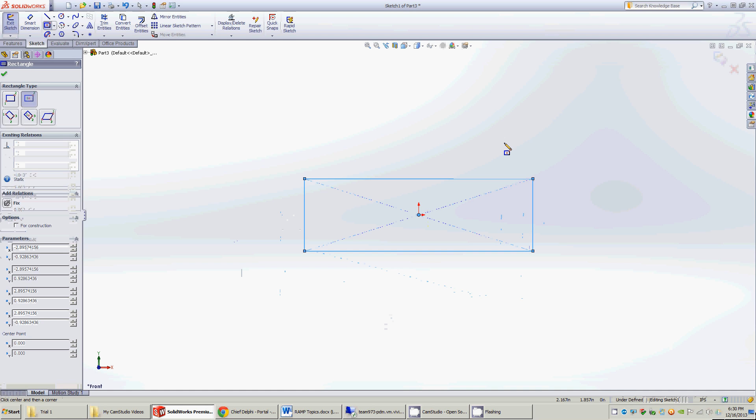So we're going to start by drawing a side rail, and instead of actually starting this as a tube, we're going to start it as a front view. I like to do this on parts where things get a little crazier, so you can have one nice sketch that shows everything. I'm going to start by doing this vertical line at the origin.

This is what I use to control our wheel drop. As you dimension drop, your inner bearing block goes down and your outer bearing blocks go up, rather than dimensioning from the edge of the tube, which can be more confusing for other people. It's nice because you have this 3/16 number.

You don't have to come in and do any math or thought to get your wheel drop. You just change that and that's your wheel drop. It literally is what that number is.

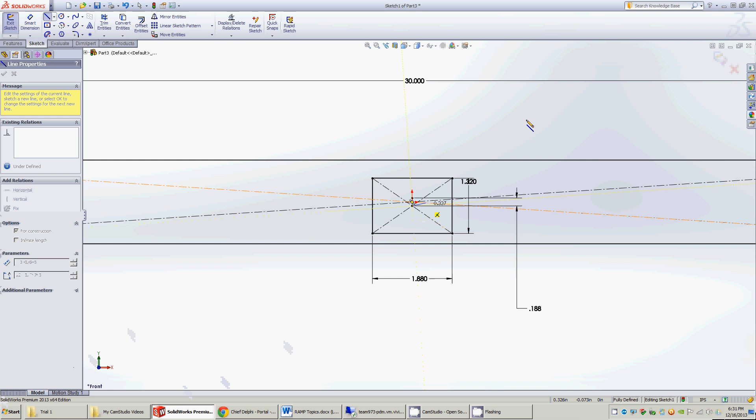Next I'm going to—don't know why SOLIDWORKS is freaking out a little bit here. We'll just wait for that to calm down. Hopefully SOLIDWORKS doesn't crash. Okay, now we're good.

If you're going to do as much as possible on this front view, you really want to show as much as possible. So I'm going to add wheels in here.

These are going to be Vex Pro traction wheels with blue nitrile rough top, which comes out to about 4.3. Ooh, did not mean that to be horizontal, so we'll fix that.

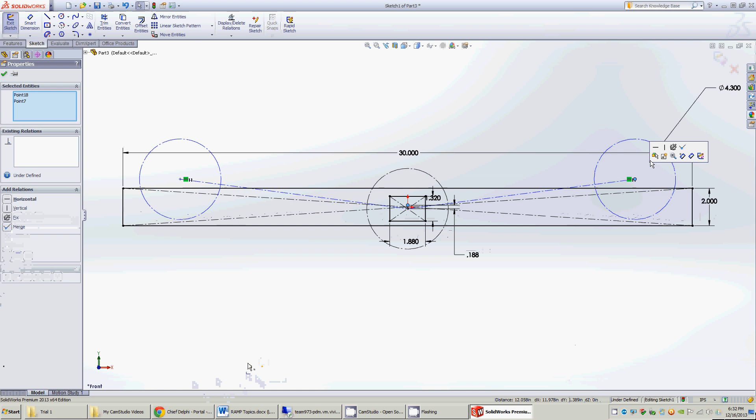Make these equal to get equal spacing. Make that horizontal, and make them horizontal from there. I like to dimension on chain spacing, so 12 inches is a good number for 25 chain.

You can see we still have quite a bit of room left on that rail, so we could come back later and make that more aggressive, but we'll keep running from here.

Now I'm going to start drawing our outer bearing blocks. You'll notice I like to do a lot of construction geometry and relations to equate stuff so that I don't have to dimension as much as possible.

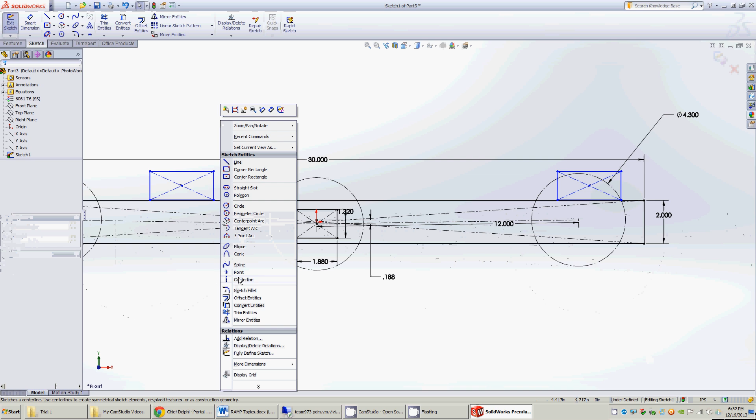Anytime you can do something with construction geometry, I feel you really should, to minimize the number of dimensions you have to change if you want to come down and change something down the road.

Okay, so now we have these slots at the right height. Obviously they're the wrong length. Ooh, very wrong length there.

What I like to do with these is, instead of actually dimensioning this block, I like to draw a block at the wheel and then dimension the functional dimensions from there.

I'll do this left edge at about 50 thou, just to take up any manufacturing errors. And this right edge—oops, oh not that—okay, go back a step.

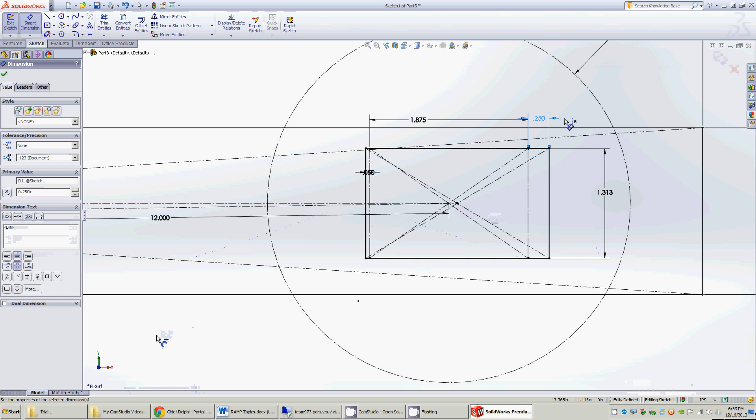This right edge at 250, that's what is doing the tensioning. Now, if you're less confident in your stuff or you want to change things later, you can do a longer bearing block slot. We kind of nailed this stuff the first time, so these numbers work for us, but I wouldn't hesitate to make your slots longer if you feel like you need that.

So now we have most of what's going on. I would like to put my gearbox holes and tensioner holes there, but we don't have that information right now, so we're going to skip that. We can always come back. So I'm going to extrude this.

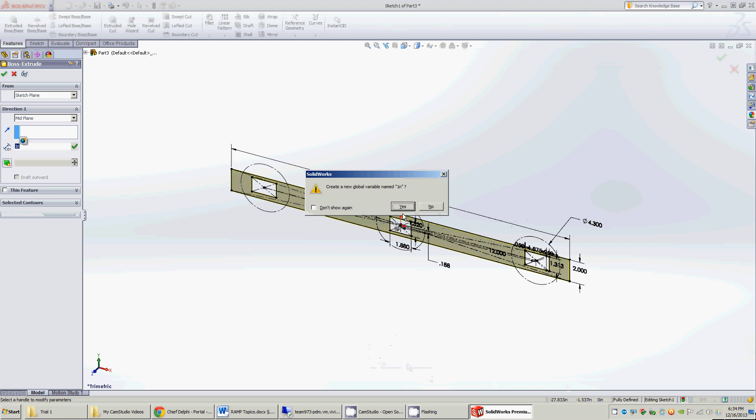Now, I feel you should always do stuff mid-plane. Oops, not trying to make a variable there. What, am I hitting the wrong key? What's going on? Oh, I've turned off numlock. There we go, back in action.

But SOLIDWORKS is freaking out a little bit, so the video program I'm using, for whatever reason, is causing SOLIDWORKS to lag really bad, so I apologize for that. So I do things mid-plane to put as much symmetry into the part as possible, and hopefully this does not crash. Let's wait for this to finish up.

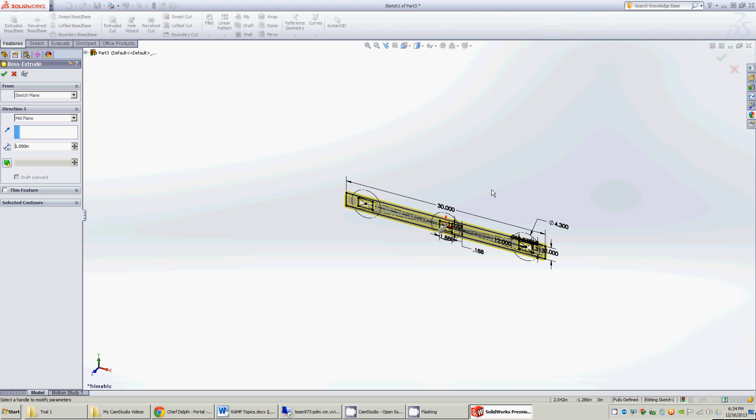So even if your part may not be symmetrical in all of its features, you probably have some features that are symmetrical, and putting those around the planes of symmetry makes using construction geometry, mirrors, or revolves easier to do. I feel like if you have to come in down the road and add a reference plane just to do a mirror, you've probably laid your part out wrong.

God, this video program is really dragging. There we go. Okay, so I like to name my features. It doesn't have to be anything perfect, just enough that yourself in the future, or someone else with a little bit of knowledge, can come in later and edit stuff.

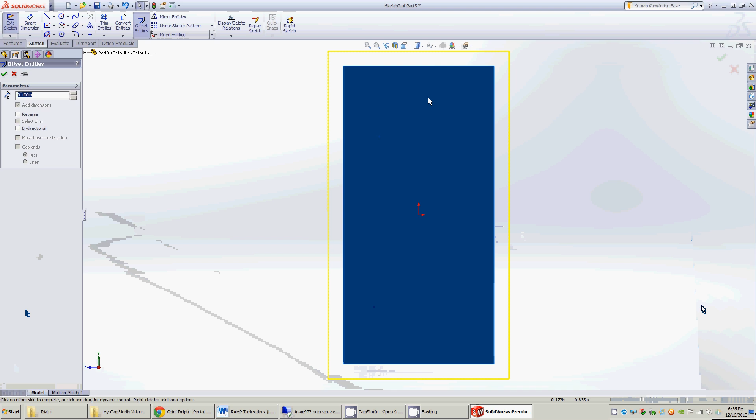So you'll see I'm going to cut this tube out now. I really like using offset entities for this. It's real fast, you can do this with one dimension then, and just cut that through all.

Make sure you're not doing this kind of stuff blind, because then if you do come back and change the length of your tube, you have to change that number. So I do see a lot of people do blind 12-inch cuts for a 2-inch part just to solve that problem, but through all really is the right solution there.

Alright, so that is our side rail.

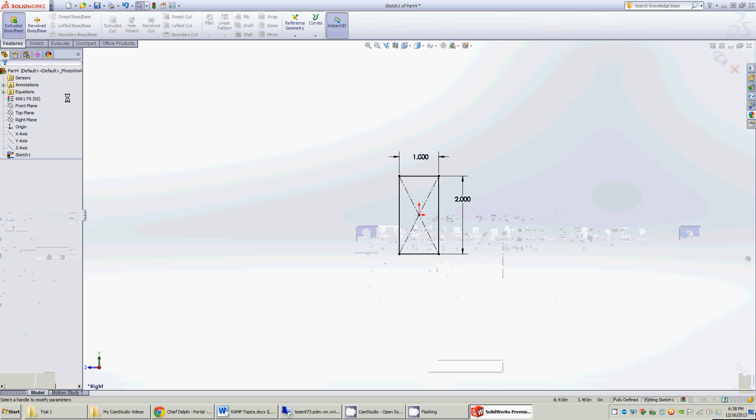So before we do anything more on this, I'm going to start kind of on the assembly. We're going to make our cross member now. This is a good part where I actually do like to start by drawing the tubing first, and I think the best way to draw tubing is use the center point rectangle, dimension your dimensions, extrude that as a thin feature with the thickness you want.

We're going to go 16th wall here, make sure that's on the inside, of course mid-plane just like everything else. And I think 24 inches probably works out here, so go with 24. Name that cross member.

So I do want a hole pattern on this, so I'll come in, and you'll see I use the construction geometry as a quick way to get horizontal or vertical relations sometimes. It's not inherently right, but it's not really wrong, and it really saves a lot of time for me.

And then we are going to linear pattern this down the length of the tube. So it should be 47 holes, yes.

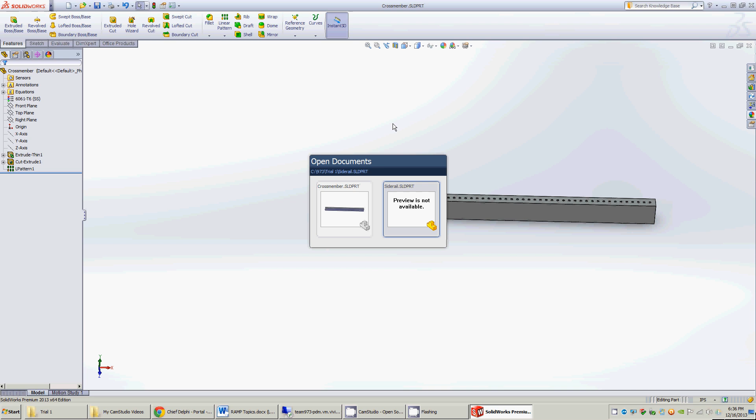Alright, so now we can start making an assembly and call that frame. So, make assembly from part, do a little thumbtack, place the parts. You notice I purposely did not put that at the origin. I'll explain why in a second.

Just like in the parts, I like to build in as much symmetry and logic to the assemblies as possible. So I mate a lot of things by their planes so that it kind of averages out over time that this does make things easier to work on.

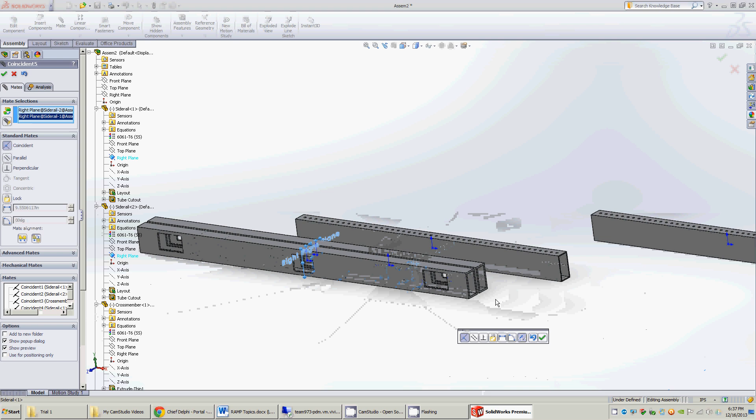And when we get to doing the top robot level assembly, it's nice because you really have a lot more control of where certain things are and for checking mass properties and that sort of thing. So they're all on top plane now, top plane with the plane of the sketch. I'm going to mate the two side rails together. You'll notice I'm going to do one backwards because the side rails will end up non-symmetrical in and out.

I will do the same thing for the two cross members in case there's any non-symmetry that comes up later. I hate having to come back later and change the direction of a tube in assembly, which might have a whole bunch of mates at that point.

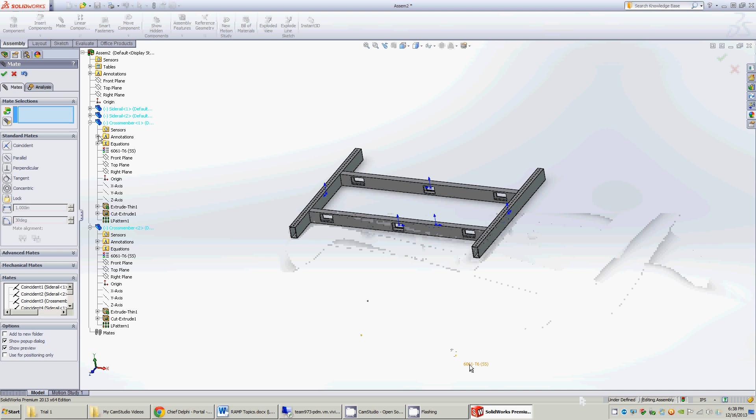So now you can do things like take the right plane of this cross member, make it the front plane there, and take the right plane of a side rail, make it the right plane there. Now you're really starting to lock things in.

These side rails are still loose this way though. Let's see where that plane is first. A great tool I love that I unfortunately didn't find out until about 2 years ago is the Symmetric Mate, which lets you mate around a plane.

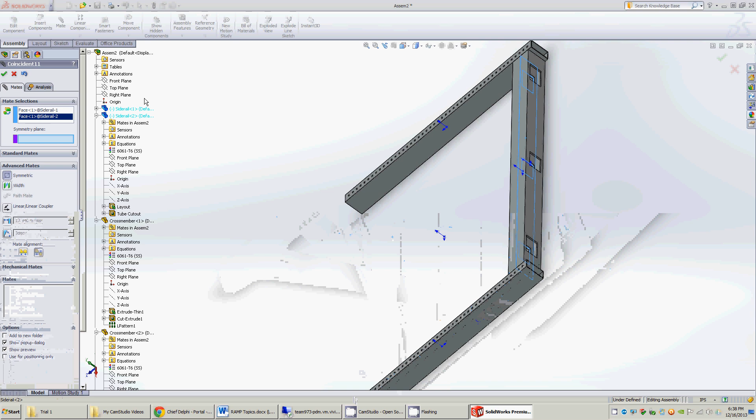What's really nice about that is it lets you dimension what you really care about. So let's say here I really want to dimension my wheel wells versus the inner dimension, so I can come in and do that. Let's go with 3 inches here, doing some giant wheels and see how that works out. So if I did all that right, we should have a fully constrained assembly.

We do. Cool. With the origin placed in the center of all those. Alright, so I'm going to turn the origins off, save that.

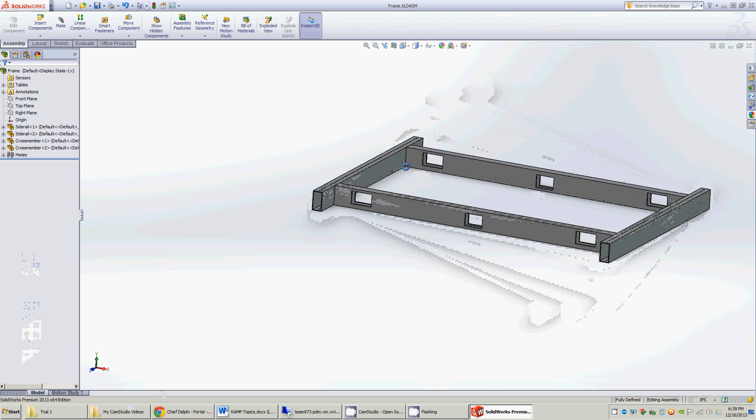Where do we go from here? So I like making the frame a sub-assembly too, and you'll see down the road why I like doing that. I didn't really have a plan for these videos coming in, so I may stall a little bit halfway through, hopefully get better at these in time.

Add the whole pattern to this guy. So for parts that I know are on half-inch increments and are never going to change, I get super lazy dimensioning these holes and do this because that saves me a lot of time.

I'm actually doing things a lot slower for these videos than I would usually, partly because the video program is lagging, partly because I want you guys to see what I'm doing. A lot of these things I do let me save half a second at a time, and that really adds up during marathon CAD sessions, I think.

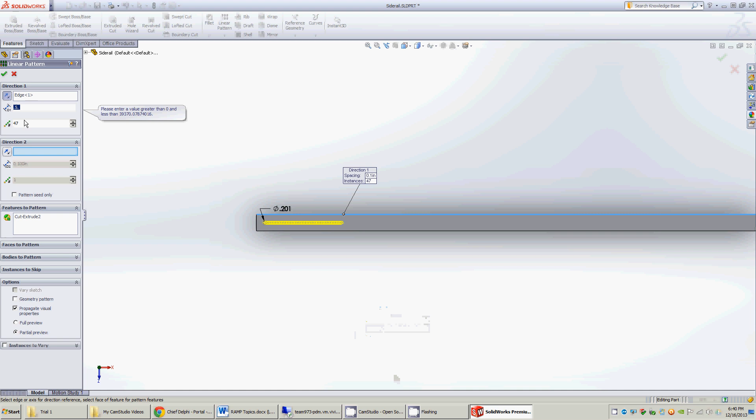This should be... oh, I don't know what's going on. Oh, it's complaining about that decimal. 47 holes. Yes. Save that.

Oh, I guess we want to put some fillets in here, so we get to use one of my favorite tools. We do a quarter-inch end mill there, so an eighth-inch fillet. The fillet wizard saves so much time.

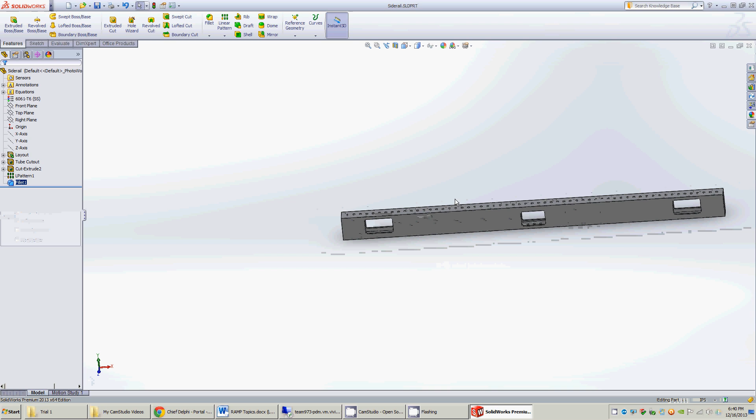Unfortunately, I think it may still be this way, but if you do a configuration, SolidWorks won't let you use the fillet wizard, and that's a real bummer. But this is not a configuration, so that's not a problem.

So we look at our frame, that looks good. Maybe let's do our gussets now.

I'll show you how I like to draw some of our gussets in a way that can save a lot of time. Once again, this is stuff I would not do at work because people would make fun of me, but I will do it in FRC without shame.

So you can see I just drew a bunch of lines. I'm going to make those half-inch spacing. Then I'm going to put holes on those lines. Maybe I want another line, looking at this now.

And believe it or not, this is how we draw most of our gussets, because it's really fast. At one point in time, I liked drawing gussets at the assembly level, but with how clean our hole spacing is, I found that often just made things harder and more confusing, and it's quicker to lay stuff out like this. Actually, let's make those holes...

196. I also love to abuse the... I do not have my tool set up on this computer, by the way, so that's going to bug me a bit. I like to abuse the slot tool for drawing gussets, because you get stuff already kind of filleted for you.

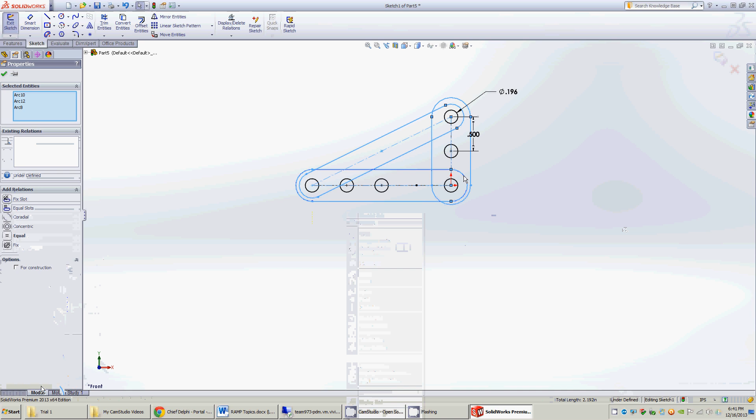Make those 0.25. Let's say we're not going to pocket this guy, and we just select what we want. Just out of habit, I do make this stuff mid-plane, just kind of muscle memory. I guess we got a free pocket there. We'll take that out, and we'll name that gusset.

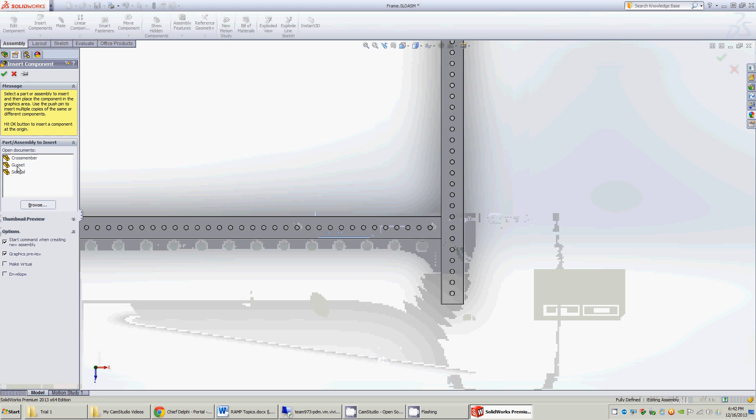Go back to our frame. Do that guy. Now, some people in this situation really like to heavily use mirrored components.

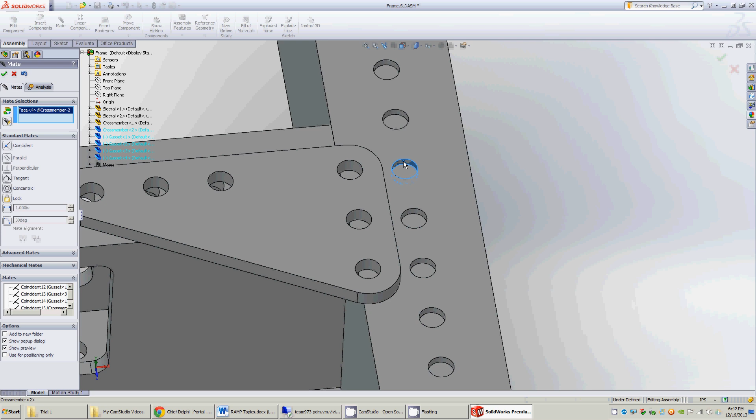Maybe I'm just wrong about this, but sometimes I really get myself in trouble with mirrored components, so when I can, I actually place stuff manually. But if you feel like you have a better way of doing this, I would love to hear that. I'm always stealing SolidWorks tricks from other people, and that's one of my favorite things to ask a new person I work with: what are your top 5 favorite SolidWorks tricks?

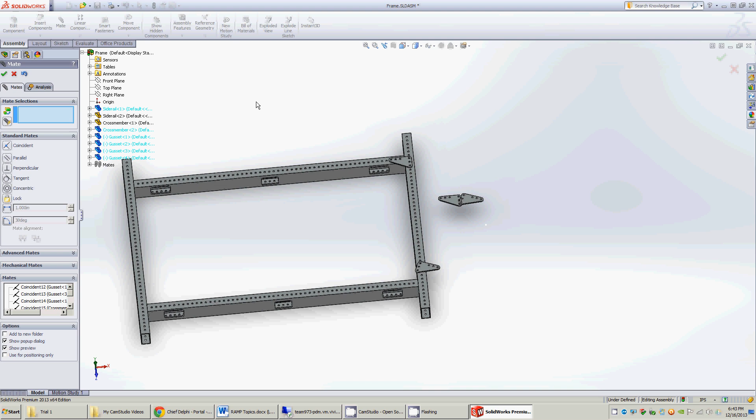Now the video program's lagging me a little bit, so we'll wait for SolidWorks to catch up. It's not catching up quick. That is unfortunate. Kill some time. Oh, there we go.

I like asking people what their favorite SolidWorks tricks are, because there's just so many of them, and it's also interesting to see different people's styles in SolidWorks.

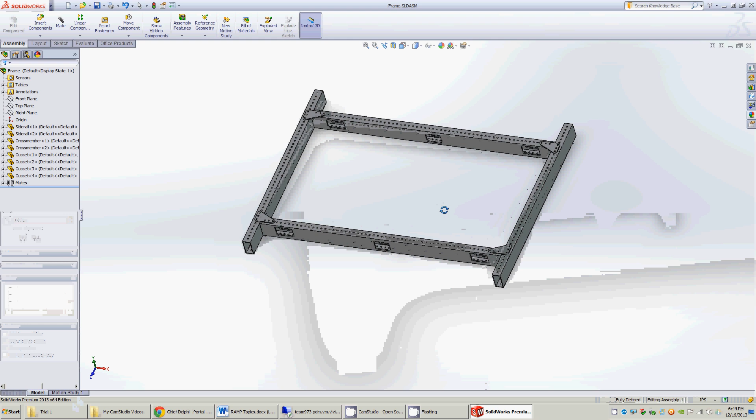So just make these gussets. You'll notice I'm not putting a gusset on the bottom side, and that's because I like to use the belly pan as that gusset. Now the assembly's still totally constrained, looking good.

I guess we can start making our drive. I'll admit I cheated and have some things done already, so I'm going to make an assembly from assembly. I'm going to put that frame in there.

Turn off the origins. Right plane to right plane. Forgot to float it first. Come down and change that to float. Hitting the wrong things. Right plane to right plane, front plane to front plane. Not mating top, and you'll see why I do that in a little bit.

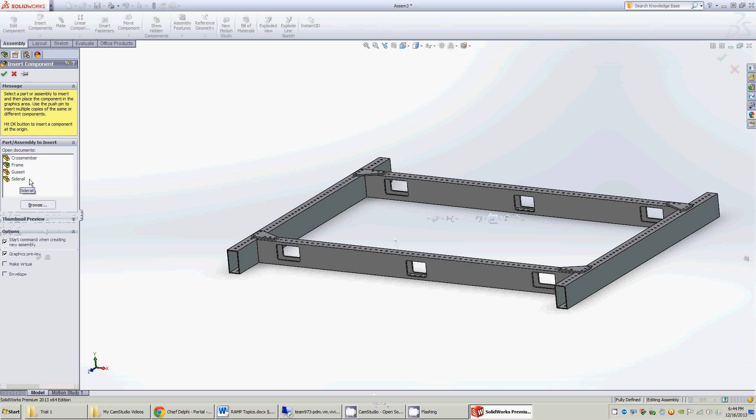So now I'm going to insert some components. Browse, let's get our bearing block in here. You'll kind of see a similar style of mine show up in a lot of things I do. And now it's lagging again.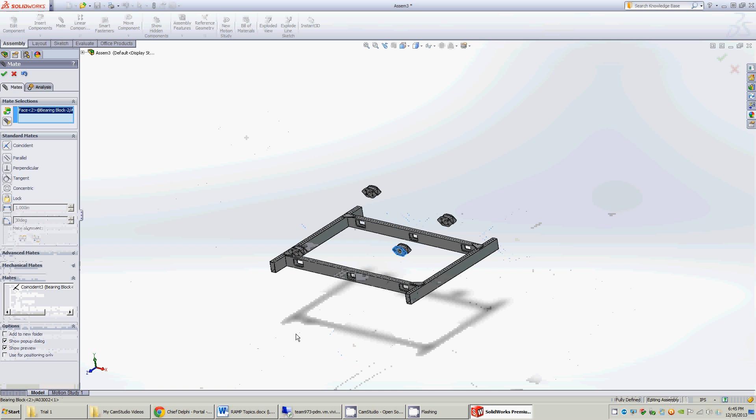There we go. I really like to dimension things like this together a lot before I place them to the frame, to eliminate as many dimensions as possible, really.

Once again, I've always felt like mirror does not work out well for me in situations like this, but if you disagree and have a good example, please show me, I would love to see that. So you see I flipped those around because there is some non-symmetry in those bearing blocks.

Actually, if you zoom in and look, there's an air gap on this side. This bearing block is 990 thou long, so that when you clamp 1 inch or nominally longer than 1 inch tubing with powder coat and stuff, you really clamp it.

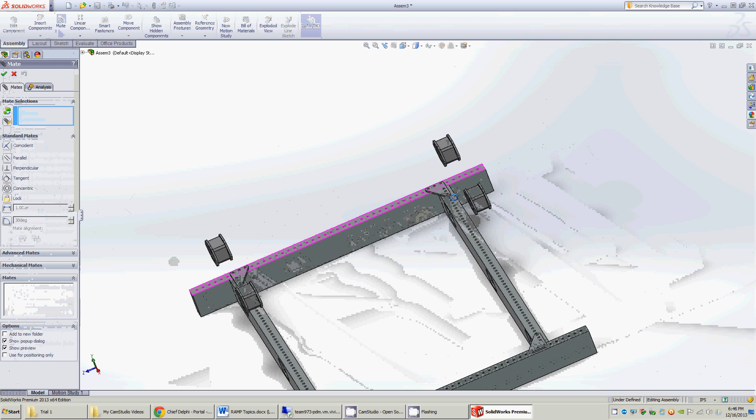I also like this because our bearings are actually in that solid block. These face plates don't touch the bearing at all. You can kind of see that if we zoom in here. That means no matter what the thickness of our frame is, if we get different tubing one year, different powder coat, it doesn't affect our shaft length at all, which is real nice.

Those bearings stay the same dimension apart. What we do is that inner plate is one that we tighten real good and lock tight and then never move again. So that is why we like to have the outer plate be the one with that 10 thou gap.

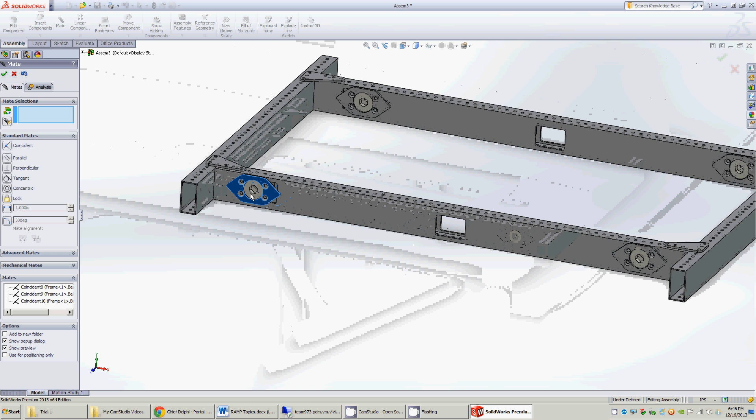So now you can see that when I move one bearing block, they all move, and that's nice. Oh, I forgot one thing I like doing, and that's coming in and using one of my favorite relations once again, the symmetric.

Let's go to Advanced Mate, Symmetric, and this should be the right plane? Yes. So now if I come in... oop, I guess we missed one. Let me rebuild and see if I did miss it. Yep, we missed one mate I wanted to do, and that's this guy, concentric to that guy.

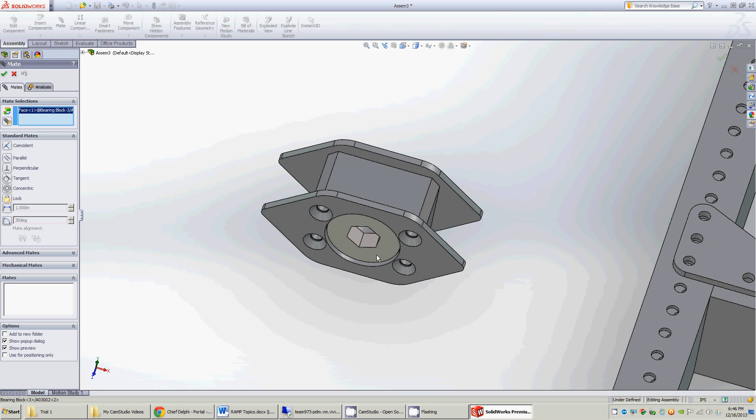So now if we just dimension one bearing block's location in terms of tension or travel, they all are set, and I think that's really cool.

So just to cheat a little bit and show a principle, I'm actually going to add a bearing block. You know what? No, we'll come back to that. So we have this in. Let's save this and call it drive.

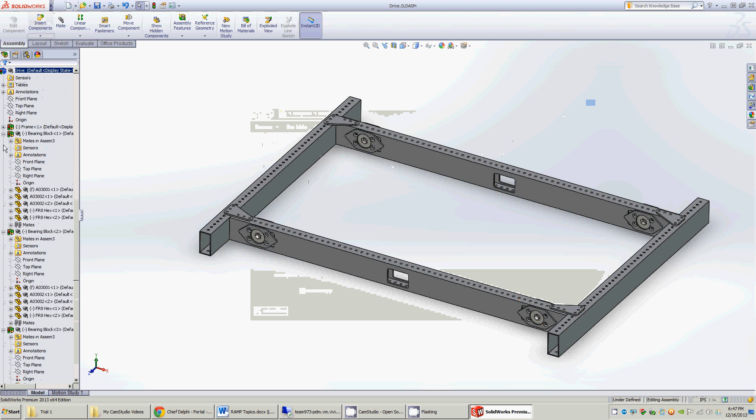What I like to do for assemblies where it makes sense, and drive is definitely one where it makes sense, is make this top plane actually be the floor of the field. So I'm going to cheat a little bit right now. Later I'd actually like to do this with the wheels in there and make it tangent, but I'm going to do some mental math instead.

So we know it should be 4.3 divided by 2, minus 1, plus half of our wheel drop, which is 3/32. I'll come in later once we get wheels and dimension that to be tangent so that the wheel sets it.

And now what we've done is if we come into mass properties, our Z mass property is placed exactly on the top plane. And I've phrased that horribly.

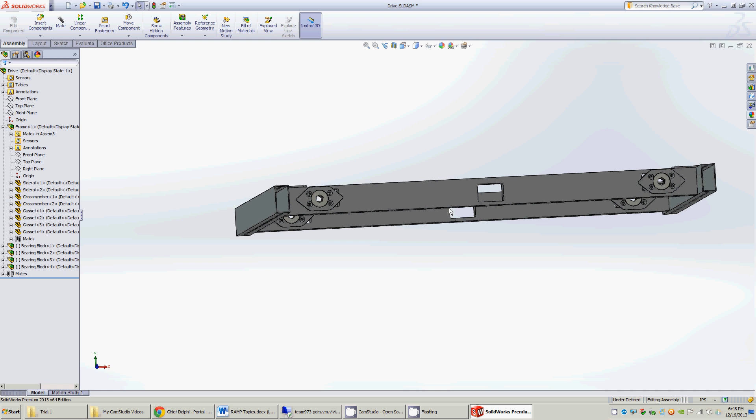When you check mass properties, the dimension to the center of gravity in Z is the actual dimension from the floor, not some arbitrary height where you then have to remember, oh, our origin's 4 inches off the ground. No. When I make this into the top robot level assembly later, that assembly has its origin at the floor.

With the front and right plane centered, Y and X have a similar effect—it's your CG from the center of the robot, left, right, front, back. So if you get 2, 2, it's forward 2 and left 2, or whatever that coordinate system is. And if you get a Z of 6, it's 6 inches off the ground, not 6 inches plus something.

It's little things like this that I think really make things just easier. And anytime you can save a couple minutes, you really should.

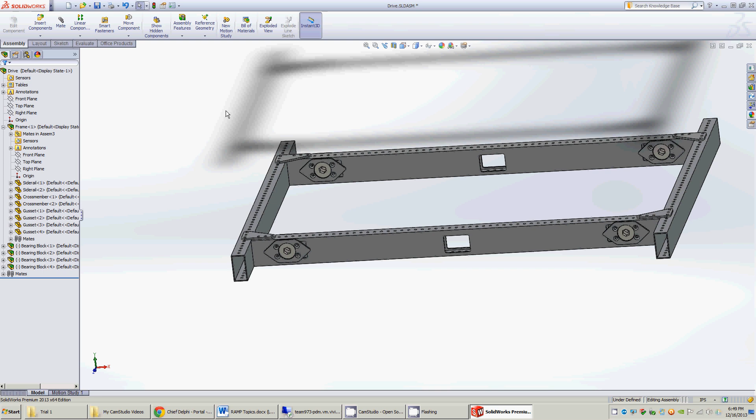So now we're going to come in and make a single speed gearbox. This is the one that can really get us in a lot of trouble, so hopefully it works out well for us. I think the origin for a gearbox should be the output bearing, so I'll start with that.

Maybe I'll pocket this gearbox, maybe I won't. I'm always afraid of teaching people pocketing because it seems like people focus more on pocketing than design, and I think that's wrong.

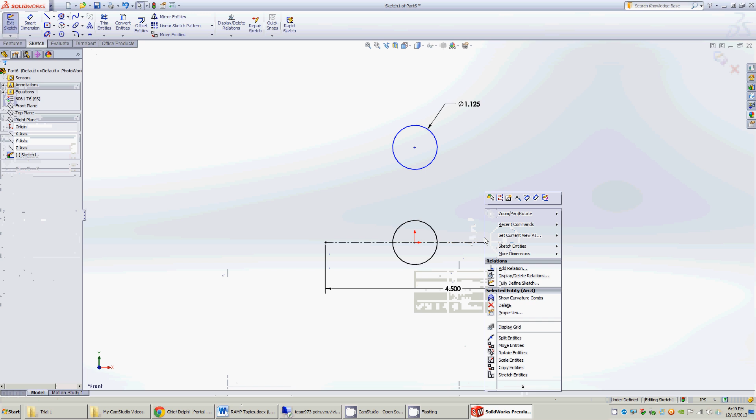Also, you'll see that I'm going to cheat and not use Hole Wizard—I'll explain why when I get there, then show you that you can still kind of do this style with Hole Wizard. In FRC, at least for our team where we use the same few fasteners, it's easy enough to not use Hole Wizard because you know the size of everything, and it makes it easier to do things in one sketch. Then, if you really want to use Hole Wizard—and it's really good for a lot of reasons—I'll show you how you can still do that with this style.

So I have no idea what gearing we're going to do, so I'll just start making some stuff up. This might put us at an impractical speed, but hopefully it doesn't. I like modeling the OD of gears, and for 20 DP, that's the tooth count plus 2, divided by 20. So both these gears are 50 tooth gears.

Let's say we have a 20 tooth pinion here, so that would be 22 divided by 20. No, let's do a 14 tooth pinion—so 16 divided by 20.

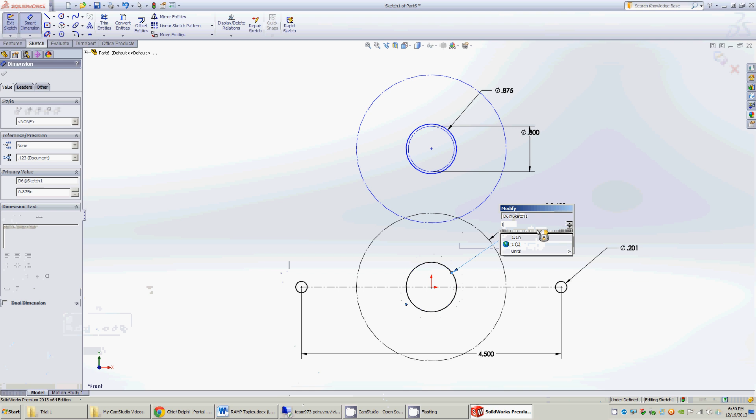And that would mean I probably have a 3/8 shaft up here, so I'll make that 7/8, which means this shouldn't be equal anymore—I'll make that 1 and 1/8. I start with stuff nominal and come back in to tolerance things later, so these are not the dimensions we'd actually cut our bearing block holes to.

Most of our shops actually don't work off the SolidWorks model—we give them that for reference and fixturing, but they actually dimension things to the drawing, and our kids work that way too, so accidentally dimensioning things nominally here is really not a big deal.

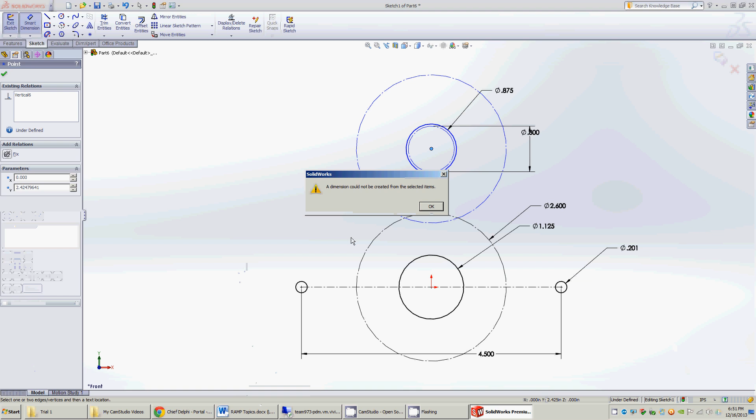So let's do our gear spacing—not sure what happened there. That's going to be the sum of the teeth, so 50 plus 14 divided by 40, plus 3 thou. Sometimes I'll make the circles tangent and set that, or I'll come in and do a line there instead—I've been doing this recently.

I'd like a cleaner way to do this for everyone to understand, so if anyone has cool ideas that are quick to implement for linking this kind of stuff, that'd be great. I used to link things the way I was talking about, but it took more time, and I don't know that I ever changed gearing enough to make it worth it. Although when I'd do an arm gearbox or something where I'd really iterate gears a lot, I'd invest the time up front so that when I changed gear ratios it would go quickly. Often I'd put the full system model into a design table using Excel, percent stall and everything, and do my iteration there, having that change my gear sizes and center spacing. It was really quick and cool for that kind of stuff, and I'll dig up that file and post it if I can find it. I'm afraid I don't have the raw SolidWorks file for that gearbox though, but it's a cool trick.

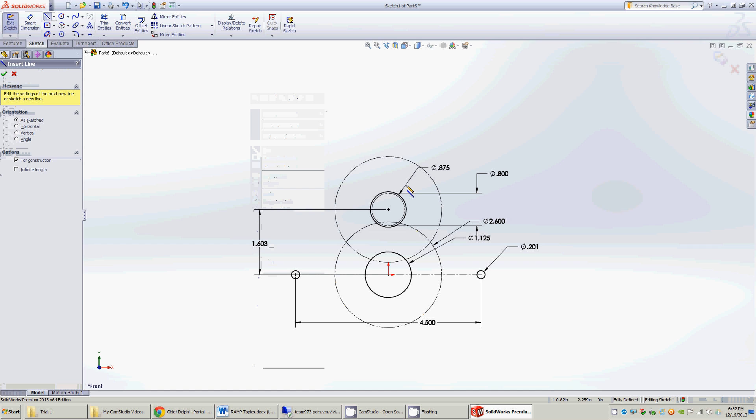But let's stay on topic here. Now we have a 50 tooth gear not driven by anything, driving a 14, driving a 50, which was the output. So we need some CIMs on here.

You'll see I love to abuse construction geometry, so these two lines represent the center to center from the CIMs there. We're going to go with a 12 tooth, so that will be 12 plus 50 divided by 40 plus 3 again.

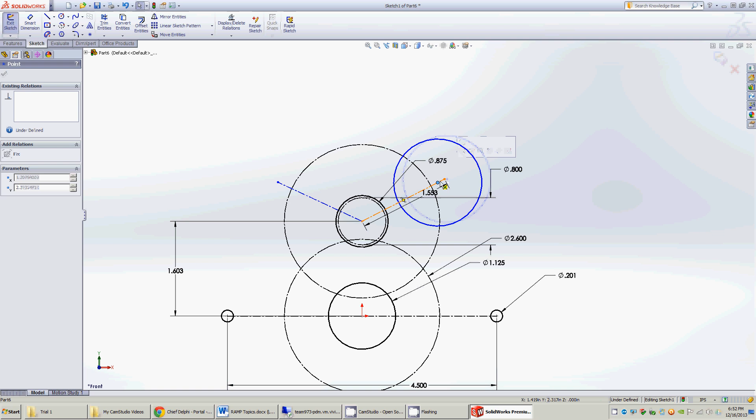Draw some CIMs in here. I like to draw my CIMs at 2.55 just to give my models a little more comfort room, but I don't think I've ever measured a CIM bigger than 2.52. If you really want stuff to fit, you should measure your own CIMs and not trust what I say in a video.

This video program lagging is killing me.

What's cool about this gear spacing is it looks like we could fit a third CIM up there easily, although we're not going to do that today.

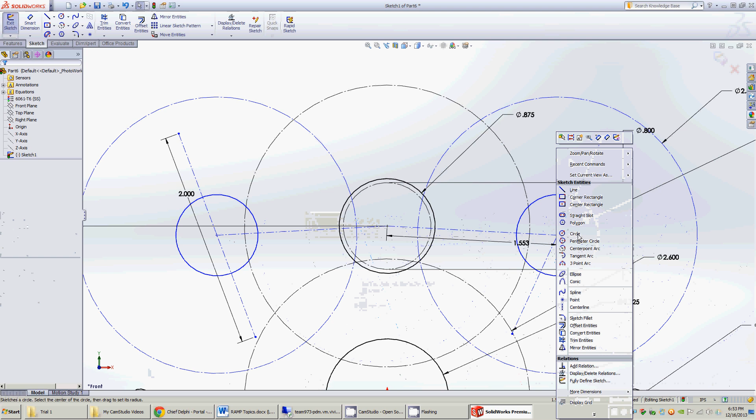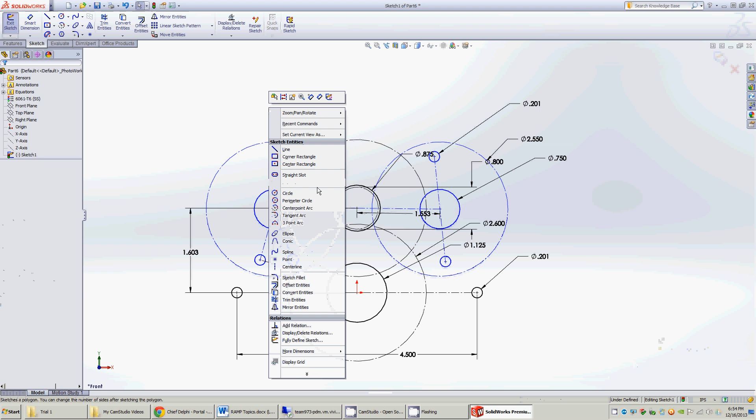You can see, once again, I'm using a lot of construction geometry to minimize dimensions. I also like to dimension what you're really going to change over time. I could have made this equal to that, but I feel like that's kind of a different hole, and maybe we'd want one to be 196 or something, something we might change later. So I don't like to link too much stuff because you can get yourself in trouble.

I'm going to use this midpoint line to link that vertical, and that's kind of a hokey trick, but it's cool because now you can rotate these holes however you want. Maybe we'll do these vertical. That looks decent now, and we'll set the CIM at some height. I'd usually lay these things out a little more intelligently, but I'm doing this quickly for you guys.

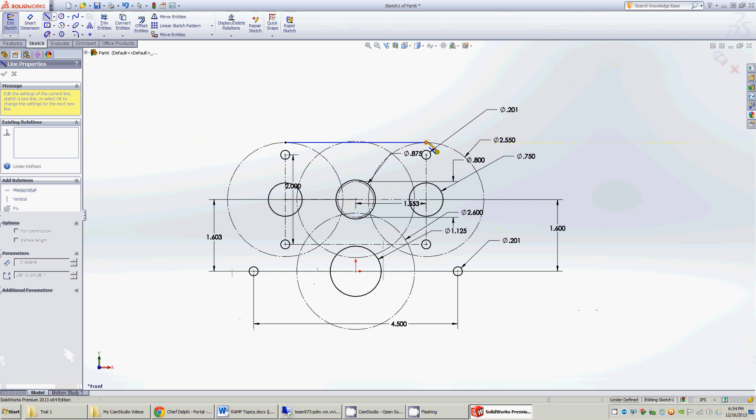So now we have the start of the gearbox, so let's draw the outside meat now. I'm not... why isn't that snapping too?

The shape of a gearbox and its pocketing is something I feel is really hard to decide up front, so I'll try stuff, see if I like it or not, then come back and try more. Today I'm not going to spend too much time on that because I'm focusing on more important things, and if teams are really getting into designing their own gearbox plates and pocketing, they probably don't need too much of my help.

Sometimes, depending on the size of the gearbox, I like to make this cover the gear. Sometimes I don't. I guess today I am.

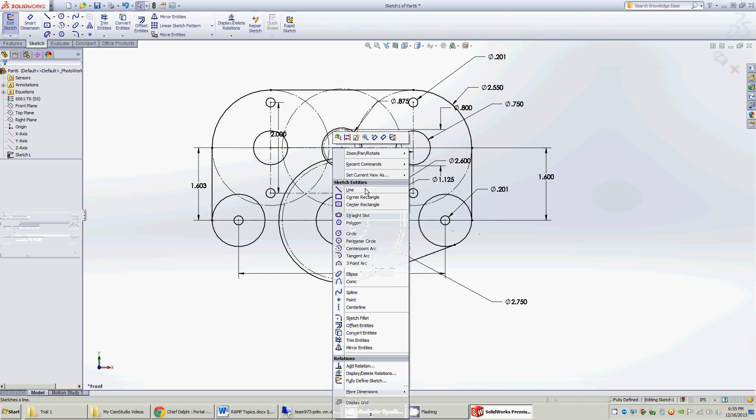You'll notice I didn't dimension these circles out here, their size, and that's because I just made that right side vertical. See how that looks. That gives you a lot more material than you need, but I'm running with that for now.

Alright, so now we have a gearbox. One last thing - we do need to add, at least for us, the bolt circle that connects to our bearing blocks.

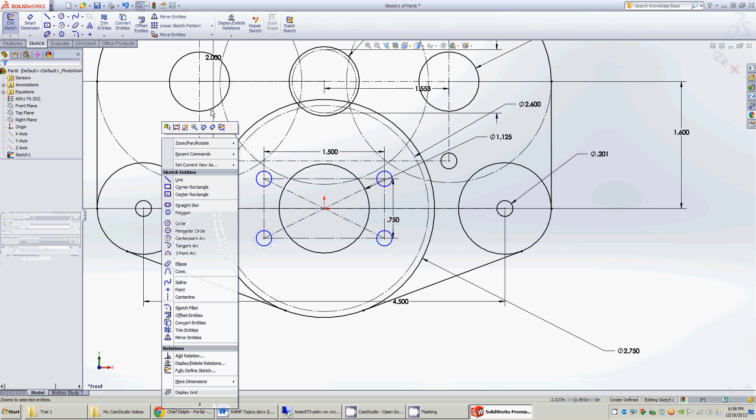This is the case where I will absolutely use Hole Wizard to get the countersink. What I like to do when I'm doing this style gearbox for holes that are later going to be Hole Wizard is I will dimension them implausibly small so that if you saw them you would know they're wrong. Then that gives you the centers for when you come back later to do Hole Wizard.

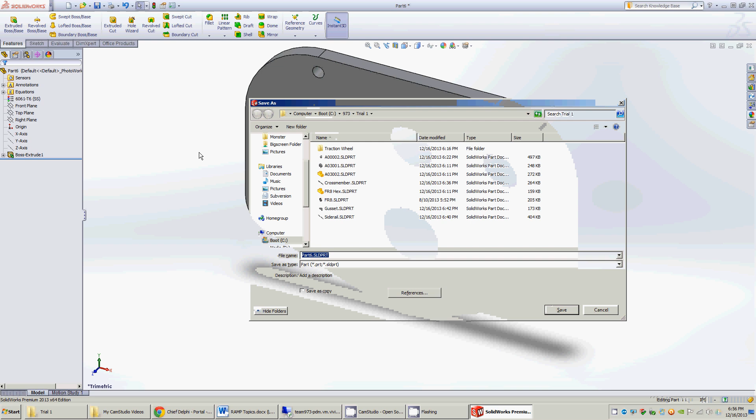So click stuff and get stuff working. Cool, looks like this worked pretty easily. 0.25 mid-plane - the 1/4 inch plate we actually get is 0.26. I'll make that slight change because that combined 20 thou can get you sometimes depending on your design.

So now we have this gearbox. I'm not going to populate it with gears and stuff today. I feel like I proved enough in that sketch that this clears, especially if you poke around there a little more. I might not have actually. Usually I spend a little more time at this level really making sure stuff clears, but it looks like everything clears here. So I'll come in and do some of the Hole Wizard-y style stuff I was talking about.

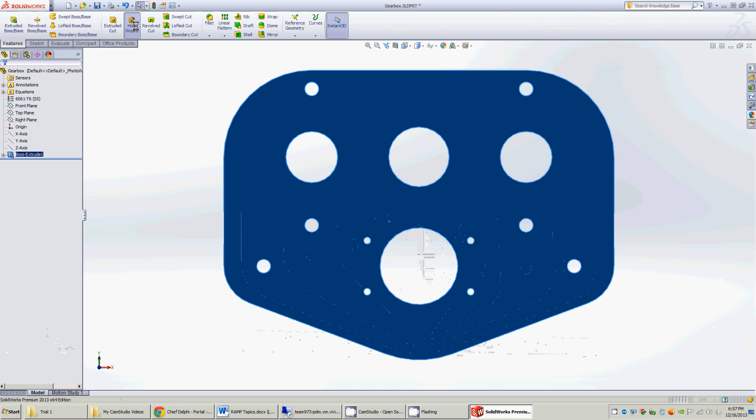So I want some countersunk holes in here, so I'll come in and I'll grab Hole Wizard. Number 10, normal, cool - everything's set up how I want. You can tell I only really do stuff with 10s on this computer. So there's that.

And we're lagging again. Alright.

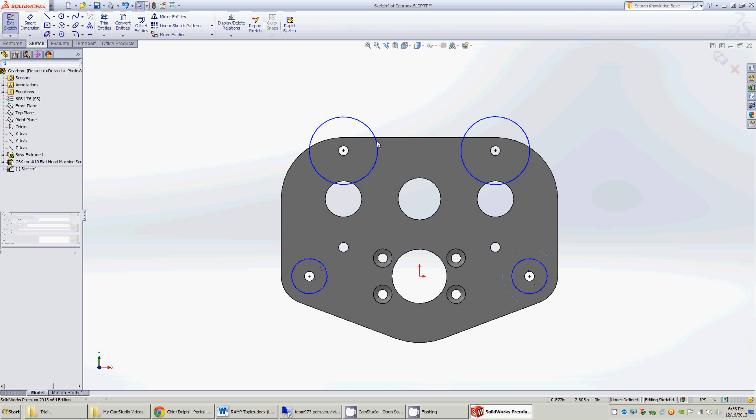Okay, also I guess our gearbox does have counter bores, which would obviously have to be separate from the first sketch. And this is for tubing to use as standoffs. This is something we totally ripped off of 254, 968, and those guys. And it's really nice. I think RC is doing this on the gearboxes he sells now.

So we do that, I want to say 100 thou meat left, so I do offset from surface.

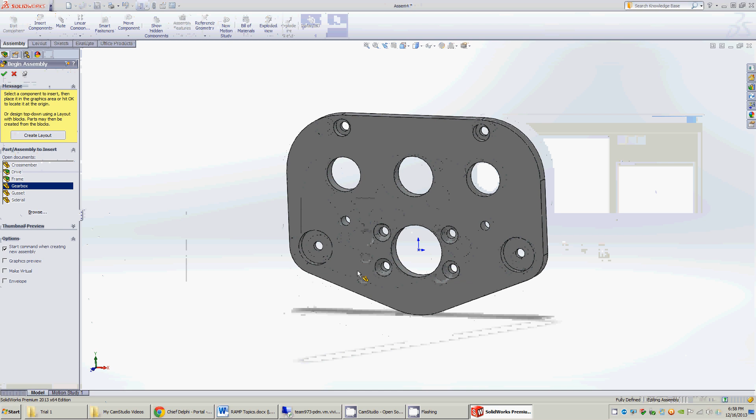Alright, so we're going to make this into an assembly and just call it a fake gearbox, even though we're not going to put gears and stuff in it. Maybe we'll do that in another video.

So maybe this is 1.25 inches apart - just making these numbers up. It sounds plausible. Actually, I think with VEX gears, 1 1/8, because you have 1 inch between the two gears, they're 1/2 inch each, and you have a 1/16 per bearing flange. So that should be good there.

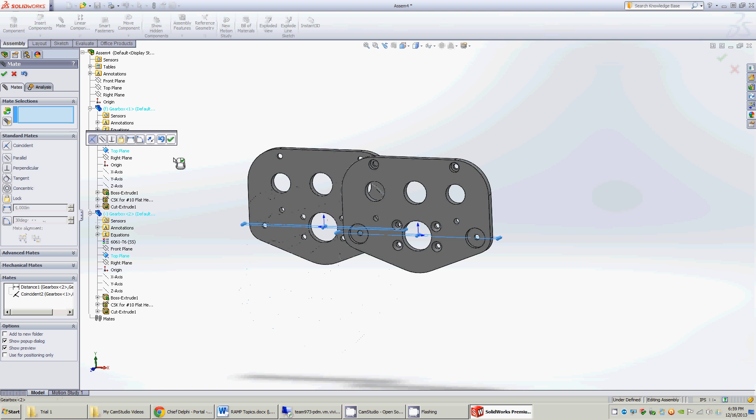Once again, you see me making a lot of stuff with planes. I really like doing that.

Oh, and you can see that I actually dimensioned that 1 1/8 wrong. I would have wanted that to go the other way, so let's fix that. That's this guy here - oh no, that's not right. Mate alignment, flip dimension. There we go.

Then now I'm going to want to mate the right planes. Cool.

I don't have any sims set up conveniently already, so we're just going to leave that without sims. You guys can all trust, maybe standoffs would go in there and yada yada.

Oh, so I am going to insert half of a bearing block. I'm going to be really lazy and use this CAD file. No, I'll do it right.

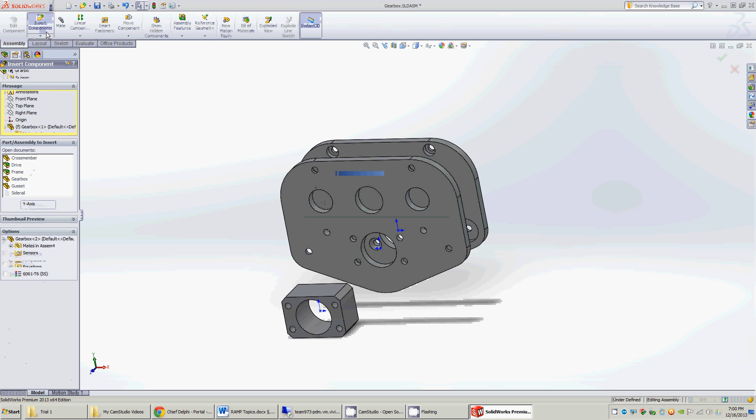Oh, that's not what I want. I need these two guys. There we go. There's that. And that.

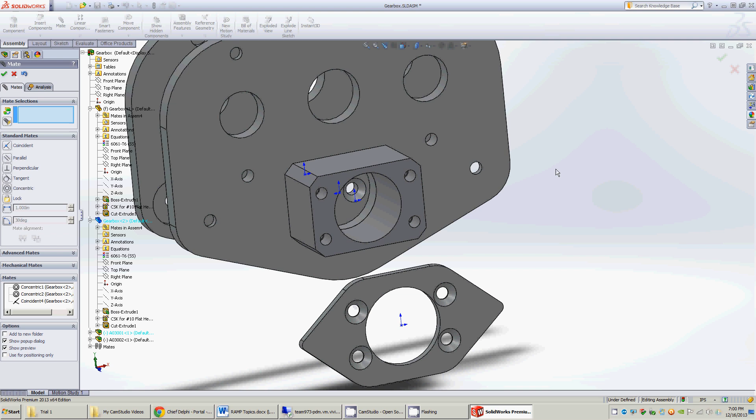So the gearbox style that we've used for years uses our bearing block as our center mount. Some of the ones in the market and some of the ones that other teams have done do that, some don't. Not saying that's right or wrong, it's just what we decided and it works for us.

And I'm lagging again, unfortunately.

If you're particularly interested in our West Coast stuff, all of our robots, probably 2010 to 2011, and then to a lesser extent the 2013 drive, would be great ones to look at. And those are all posted. You can get that in my signature on Chief Delphi, and I think they're on our website as well.

Alright, so there's that. Let's throw some bearings in there.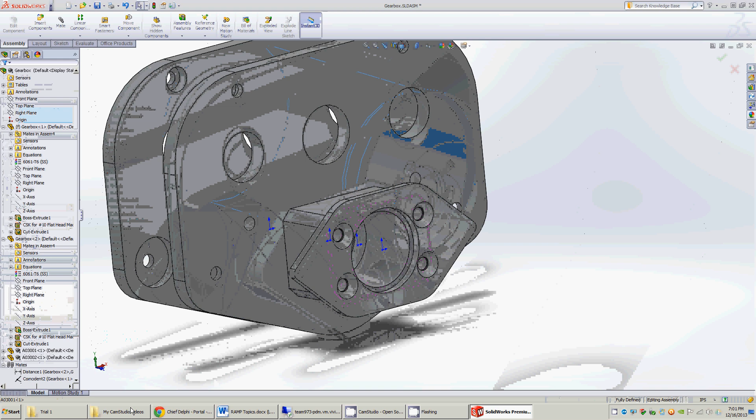Gotta love hex bearings. Getting that error.

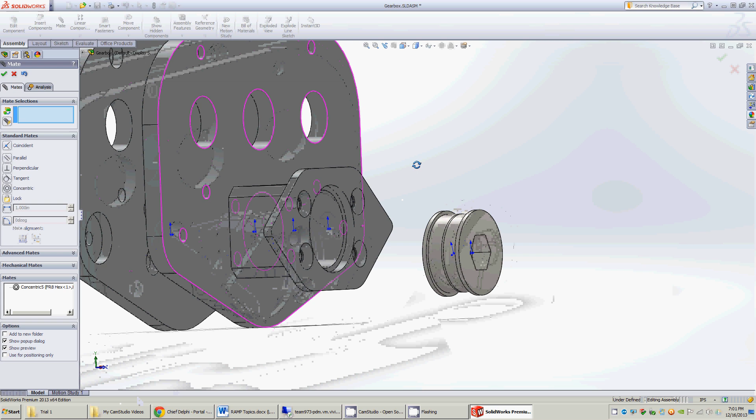We actually run this bearing on the outside of this plate because if you look at the shaft stack up, you need something keeping your shaft from coming out this way, so a snap ring on that back edge is what we do on our stuff.

Alright, so here's our imaginary gearbox. Let's go back to our drive assembly. We're going to insert 2 of them. And in case you missed it, now we know what we want to do for our gearbox spacing for mounting, so we're going to come in and add that.

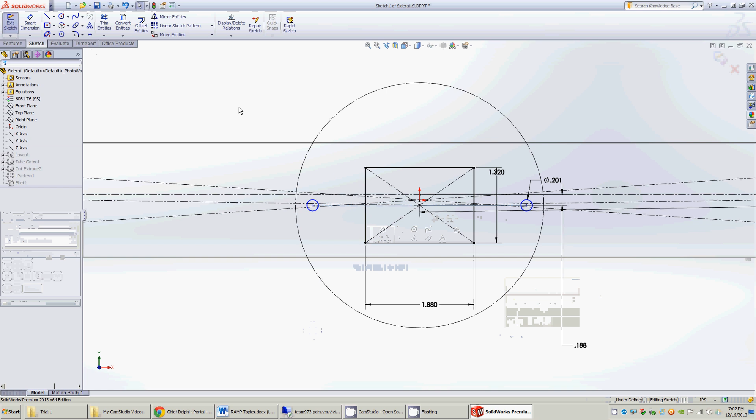So we decided it was going to be those holes on a 4.5-inch center. And then for bolt access, what I like to do is just come into the second feature. Because we only bolt through one wall, you can actually get a lot better connection that way. Unless you want to go in and add tubing in that wall, crushed tubing or something.

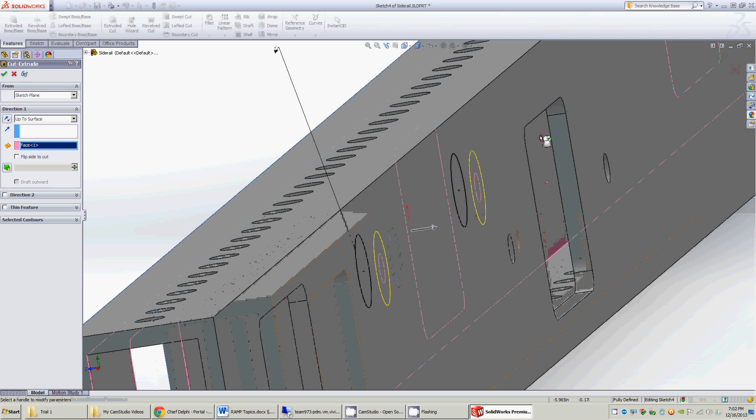And this may look tedious, but those bolts are so long, and we do socket heads, that this is really easy for the kids to get in there and do. The bolt is too long to actually lose in the tube, so not a problem. So I do like bolt access or something, just enough so someone later will understand the stuff.

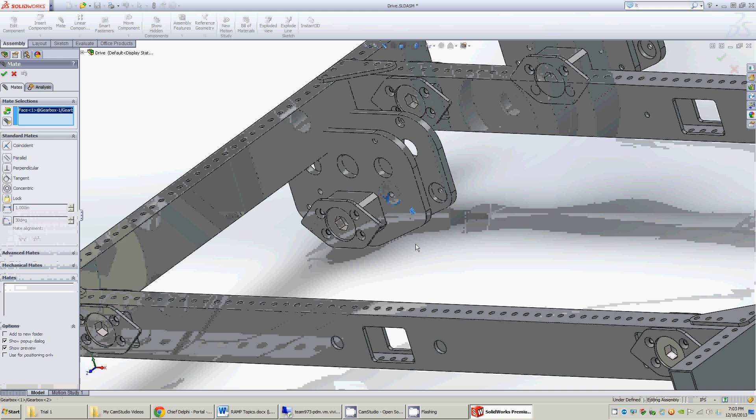So now, if we come back in this assembly, everything should work out. Pick up the 2 bolt holes.

And just like everything else, I'm going to come in and I like using my right planes and my top planes to do stuff. So there's that. So what next?

Maybe let's add some wheels in here. Another part I cheated on. So I have a Vex traction wheel configured how we want it already. So I'm going to come and add 3 wheels.

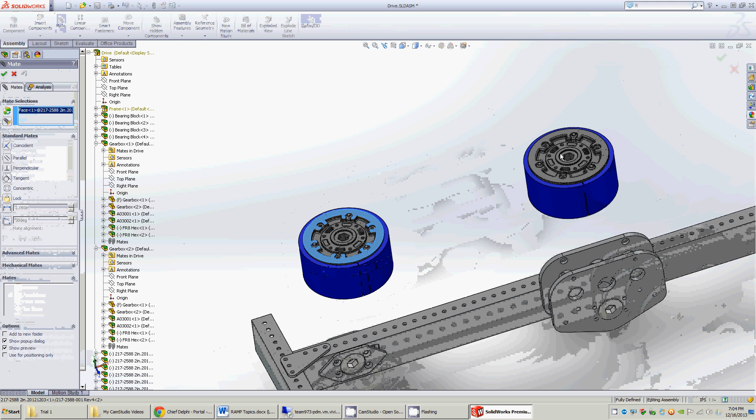You guessed it, just like everything else, I'm going to come in and mate all these wheels together as much as possible before mating them to the assembly. And it's lagging again.

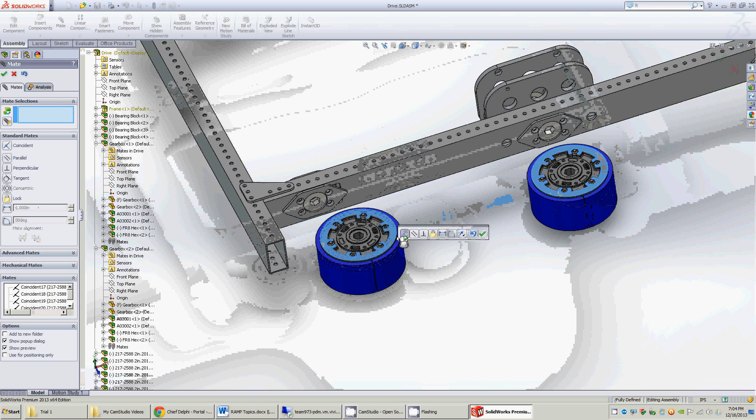Usually I would have shafts in here before I mate stuff, but I'm going to be lazy and mate bearing to bearing.

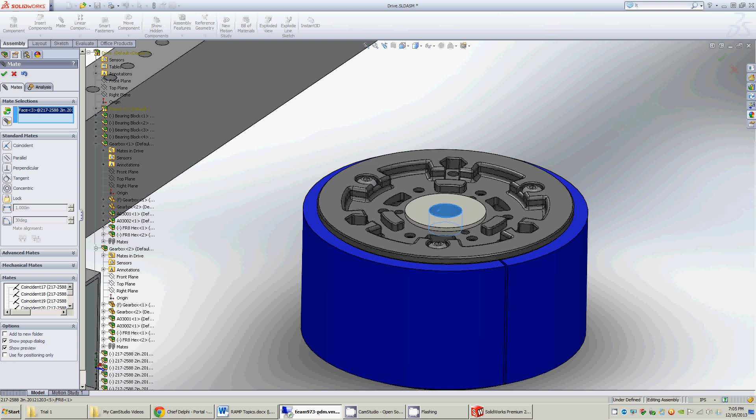And we're lagging once again. Save before we lose everything.

Looks like it's complaining about something in the frame. Rebuild, see if that fixes it. No, okay. What have we done in the frame to get an error? I don't believe it was complaining earlier. That is really weird. I don't know what caused this. That's really unfortunate.

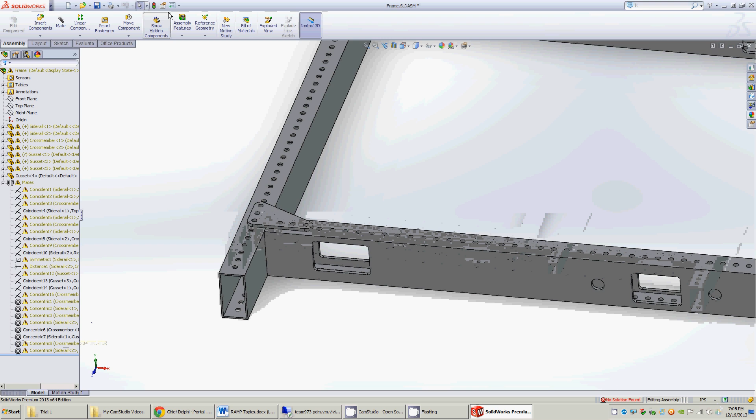So I'm going to ignore that for now, even though that's kind of bad practice. That was totally fine last time we touched it. Not really sure why that's complaining.

So we'll get our wheel set up in here. And we're lagging again.

I wish I'd been a little more prepared for you guys and I would have had shafts and sprockets. But I was not, unfortunately.

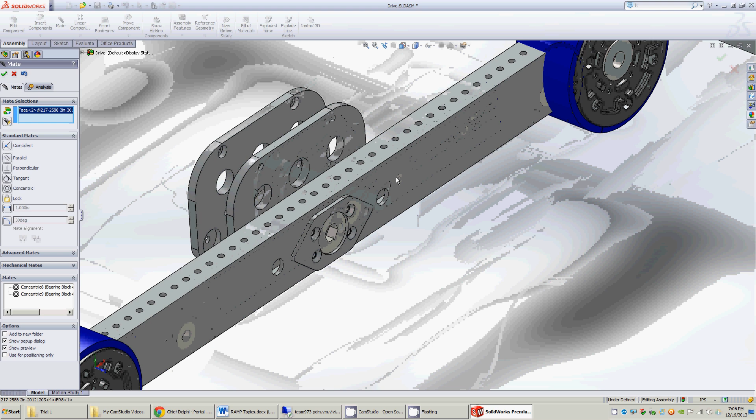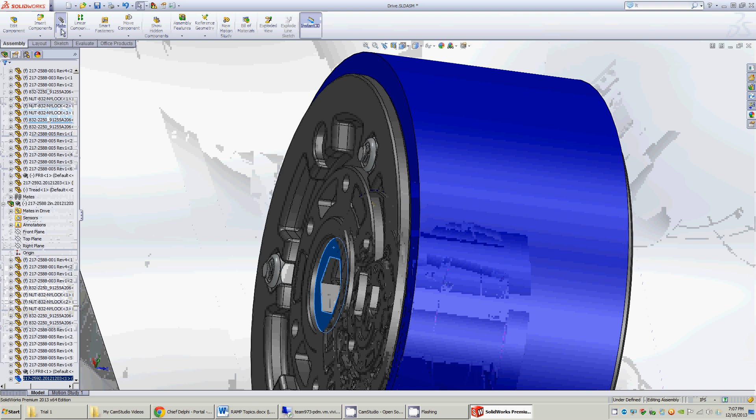So now we're going to come in and use, once again, one of my favorite tools, the Symmetric, this time across the front plane, so that we can come in and, let's say we're going to dimension this, because we're going to do some nominal spacer maybe. So let's see how a 1/4 inch looks there.

The top view. At first glance, that looks good. We actually replaced these nuts with thin profile nylock, so we'd have that space. Also, these wheels could just have the fasteners on the other side. So this looks like a problem, but it actually is not.

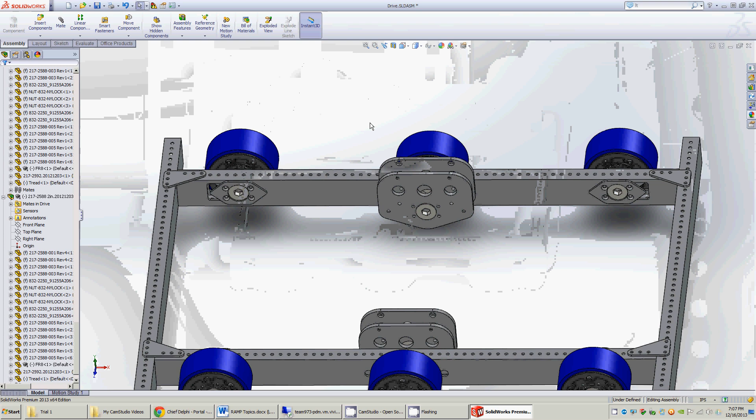So in the interest of keeping these videos short, I'm going to stop at this point. Maybe the next video we'll add in shafts, sprockets, and that kind of stuff. So if you have any ideas, we'd love to hear them, because I'd really like to hit whatever you guys have questions on.